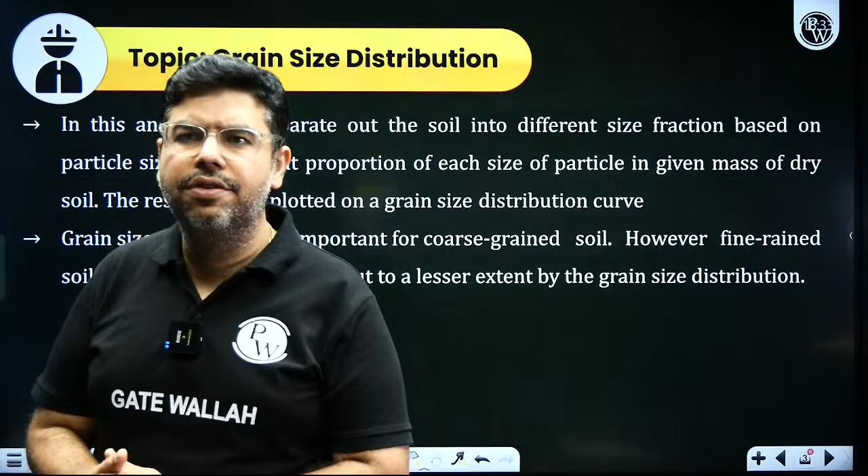grain size distribution. Okay. Today's topic is grain size distribution. So in grain size distribution, what we do is we separate out the soil into various size fractions and we try to determine the percentage of each size in a given soil sample, and the whole data will then be plotted on a grain size distribution curve.

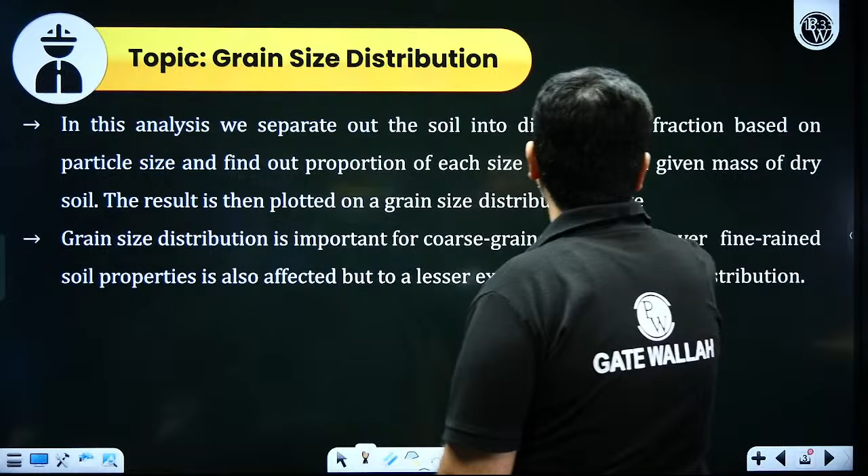So let's see how we will separate out the soil into various size fractions and how we will plot this grain size distribution curve. In this analysis, we separate out the soil into different size fractions based on particle size and find out the proportion of each size of particle in a given mass of dry soil, and the result is then plotted on a grain size distribution curve.

Now this grain size distribution is important for coarse grained soil. So the grain size distribution is more applicable to, or will alter, the engineering behavior of a coarse grained soil. Fine grained soil properties are also affected, but to a much lesser extent.

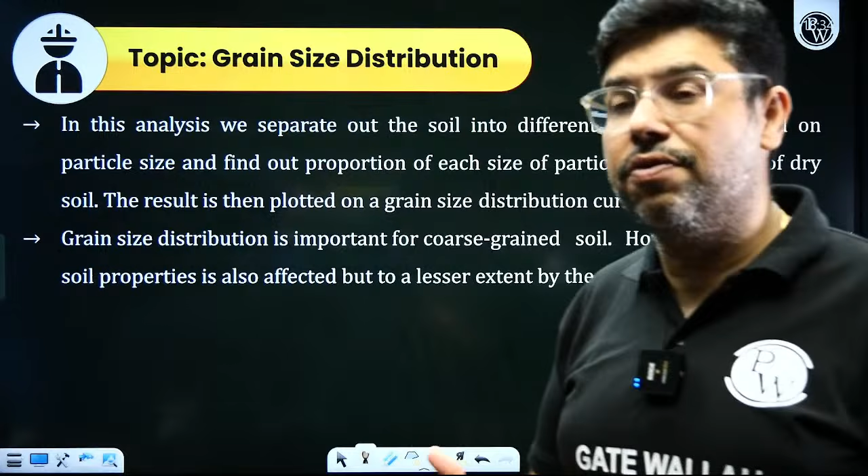Fine grained soil properties, we have seen, depend more upon the water content, like clays. Clays are fine grained soil. If you add excess amount of water, the clay will change into a liquid state or become very soft. And as you dry it, the clay will become stiff.

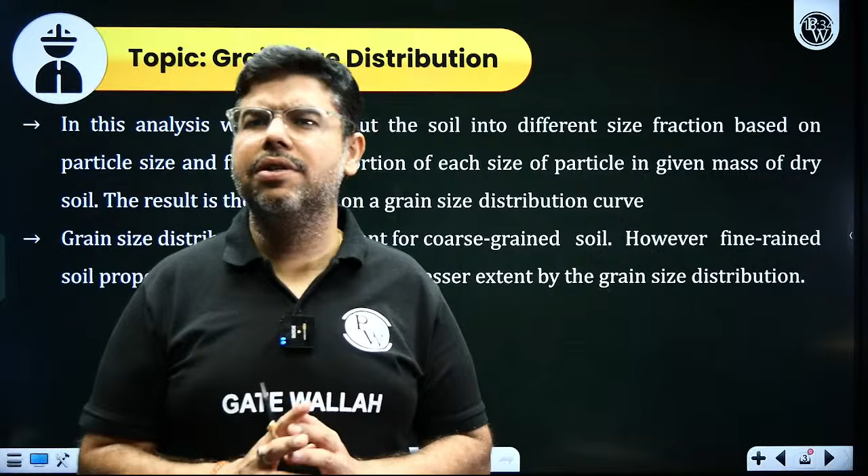So the engineering property of my fine grained soil depends more on water content, whereas the coarse grained soil property will depend upon the grain size distribution. How does the engineering property depend upon the grain size distribution? Let us see this, then I will show you how to determine the grain size distribution curve for a given soil.

See, you have various kinds of grain size distribution. Either the soil can be well graded - well graded means almost all sizes are present - or we can have poorly graded soil, also called uniformly graded, when the majority of particles are of the same size.

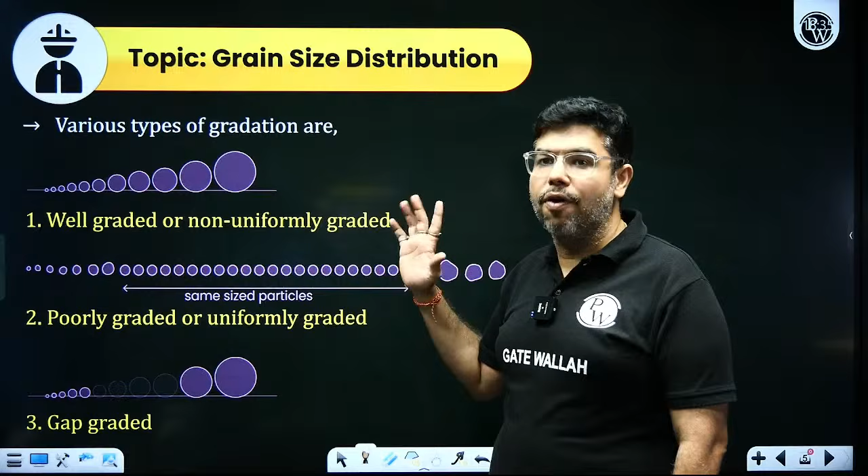You can see the majority of particles are of the same size, then it is known as uniformly graded or poorly graded. And if almost all sizes are present, then it is known as well graded or non-uniformly graded, because sizes are non-uniform. Okay. Then we can have gap graded also.

This means if some sizes are missing - either you have very large size or very small size, and the middle sizes are missing - so that kind of soil is known as gap graded soil.

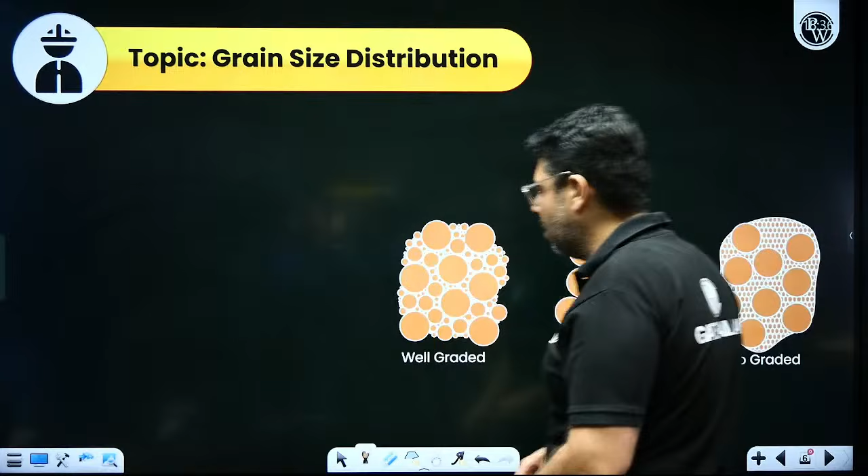Now, if a coarse grained soil is well graded, you can compact it to a very large extent. A well graded soil will look like this - the number of voids will be very less here. So you can compact it to a very large extent, the strength of the soil will be very high. In poorly graded soil, you will see a large number of voids, and this is how gap graded soil will look like.

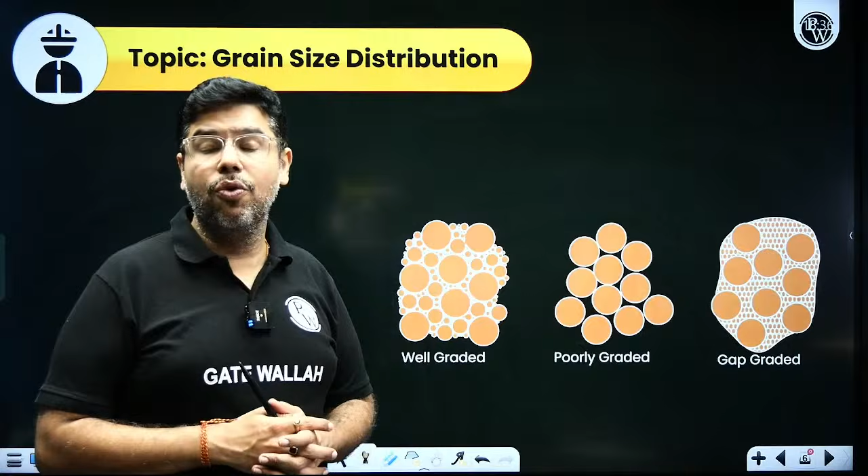So the engineering behavior of a coarse grained soil will then depend upon gradation. If you have well graded soil, you can compact it to a larger density, thereby giving good strength. Poorly graded soil will have large permeability through it, but it can't be compacted to a large extent. Same goes for gap graded soil. So, the engineering behavior depends upon the grain size distribution for a coarse grained soil.

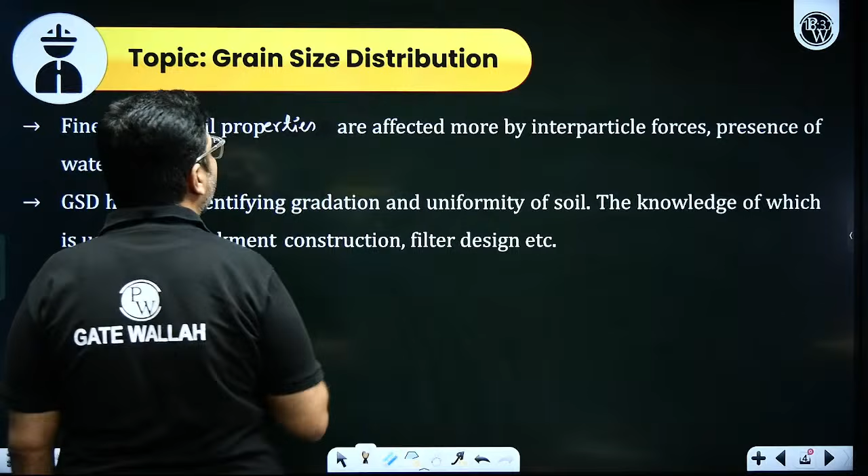So fine grained soil properties are affected more by interparticle forces and presence of water content, like I said. Fine grained soil properties depend more on interparticle forces, presence of water, etc.

GSD helps in identifying gradation and uniformity of soil, the knowledge of which is used in embankment construction, filter design, etc. So our GSD will help in identifying gradation as well as uniformity of soil, whether the soil is uniformly graded, well graded or poorly graded, and the knowledge of which will be used in embankment construction.

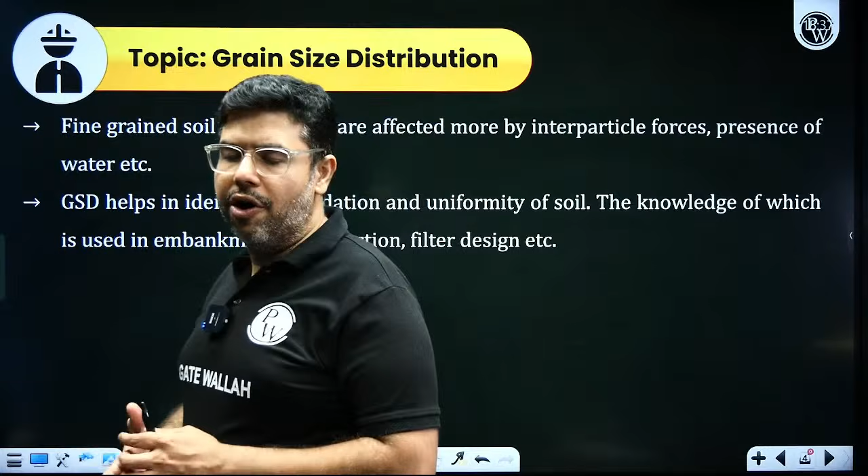For embankment construction, you are making an earthen embankment with the help of soil. There, you have to densify the soil to a very large extent, so we will go for a well graded soil. Got my point?

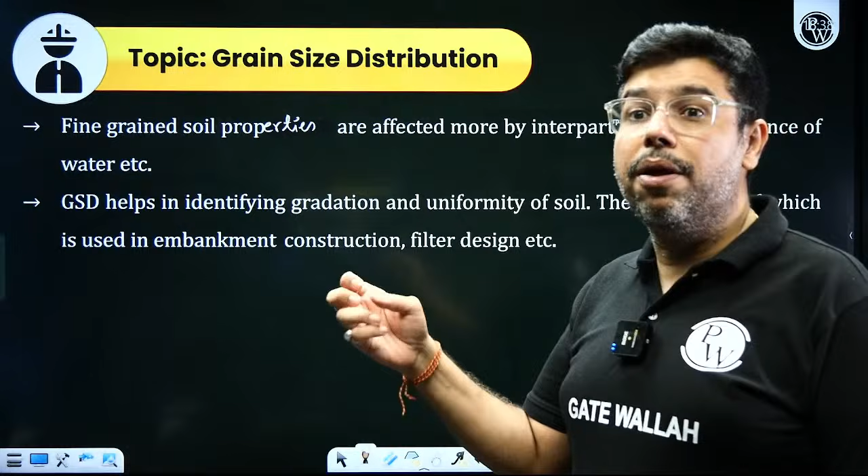Or we can have it for filter design. We are talking about sand filters. In sand filters, we have to design the voids such that water passes through the filter, but impurities do not pass. The void sizes should not be very large and should not be very small. The size of voids we can control with the help of this grain size distribution only.

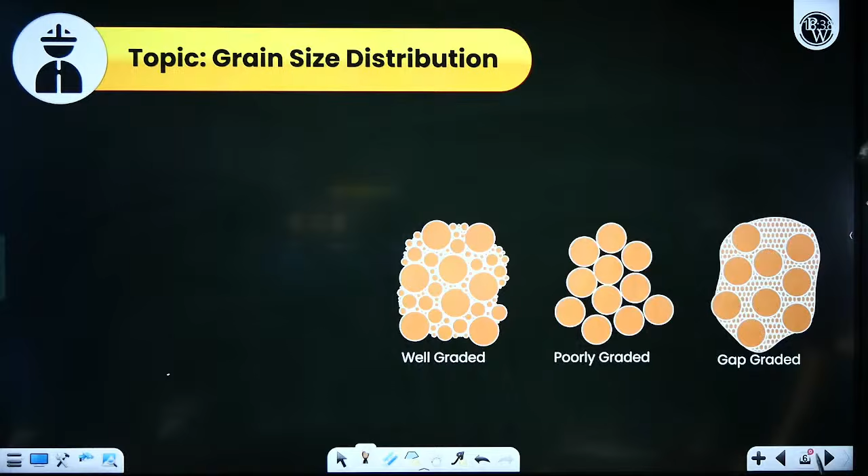Any doubts till here? I am proceeding now. The various types of gradation I have already shown you. Now, according to the size, how the soil is classified, let's see this. To classify the soil, we categorize it according to the size. Please focus here now. So, here we have size.

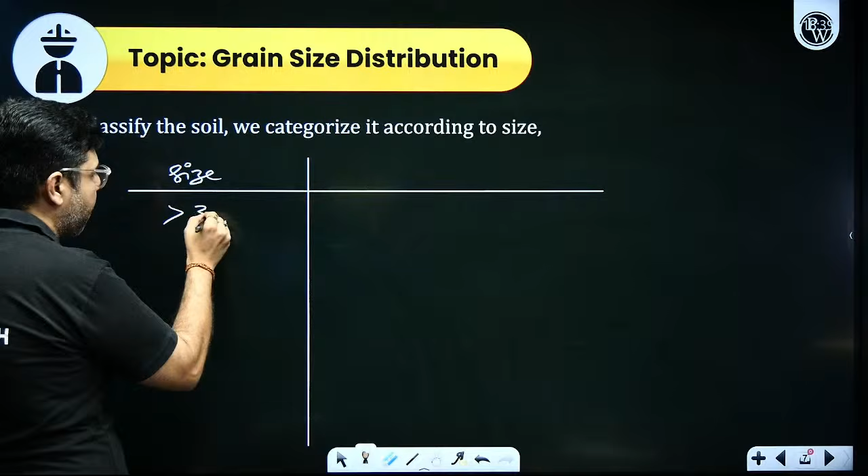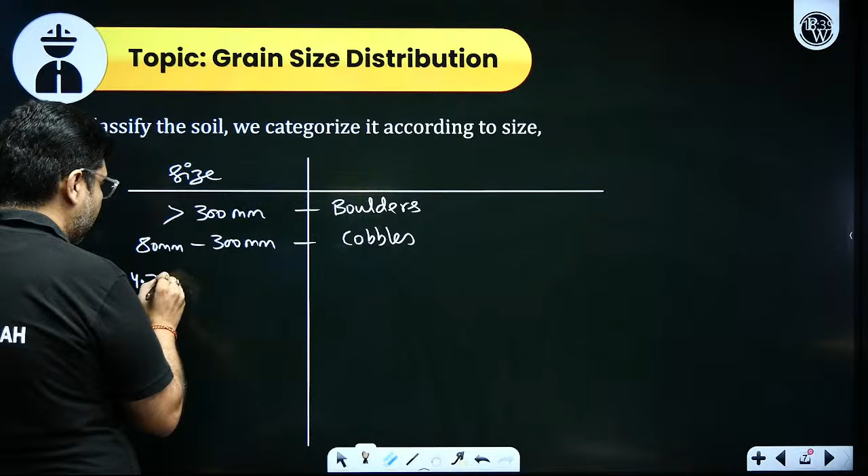If size is greater than 300 mm, the soil is known as boulders. If size is between 80 mm to 300 mm, then the soil is known as cobbles. If size is between 4.75 mm to 80 mm, then it is known as gravel. So these boulders and cobbles are not soil, they are just large stones. Now soil will start.

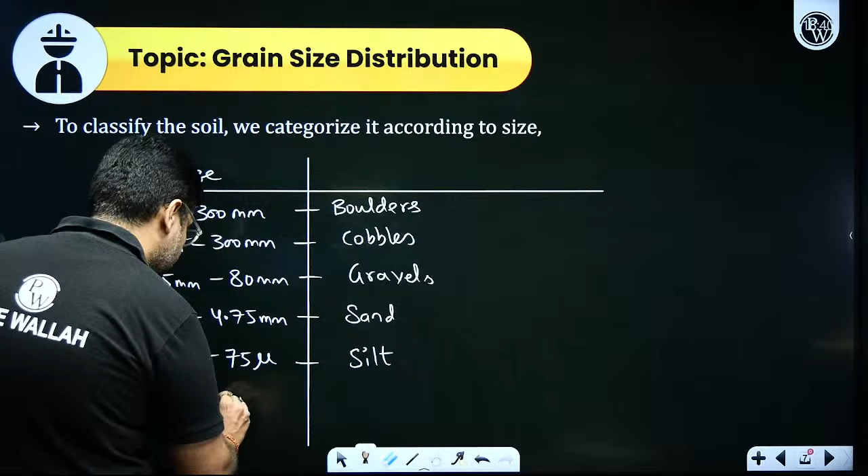If size is between 75 microns to 4.75 mm, then it is known as sand. If size is between 2 microns to 75 microns (1 micron is 10 to the power minus 6 meters), then it is silt. And lastly, if size is less than 2 microns, then it is known as clay.

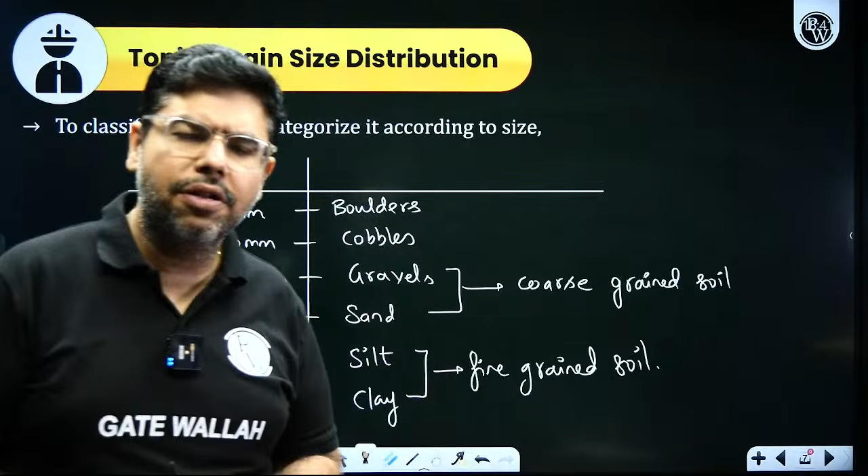So gravels and sand are coarse grained soil particles that can be seen with the naked eye. Silt and clay are fine grained soil; these particles are not visible to the naked eye. A normal human eye can only see particles having size greater than 75 microns, so coarse grained soil particles have size greater than 75 microns and can be seen with the help of the naked eye. But in the case of fine grained soil, you won't be able to see the individual particles. Got my point?

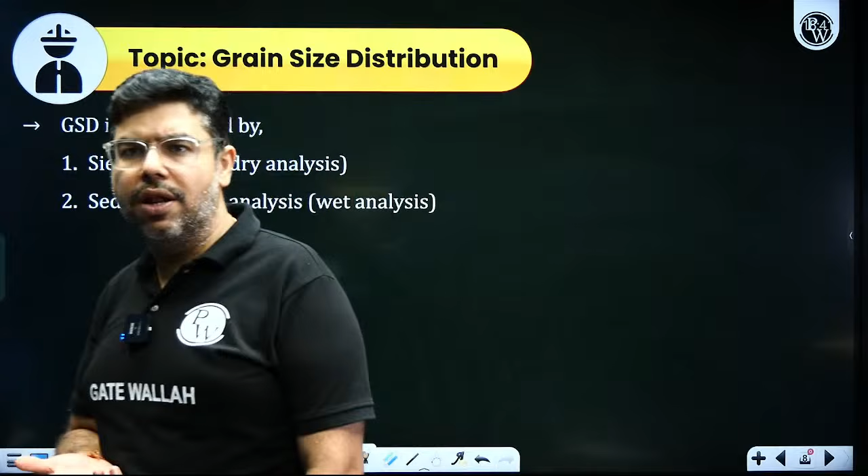Now, how is this GSD curve determined? GSD is determined using two methods: either using the sieve analysis or by using the sedimentation analysis. Today I would be covering only the sieve analysis in detail. Sedimentation analysis is not that important. So for the coarse grained soil, the GSD is determined using the sieve analysis.

Let us see the sieve analysis in detail today. Any doubts still here? Please ask me. You can take a note. If you have any doubts, please ask me. Now we will see the sieve analysis in detail.

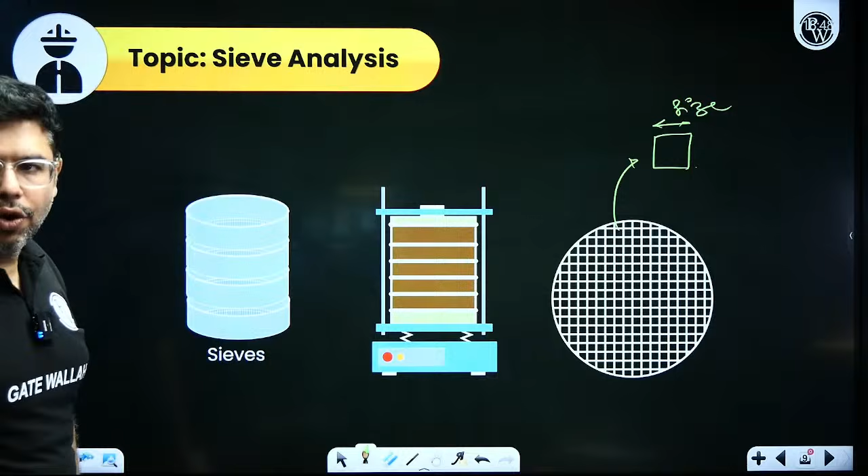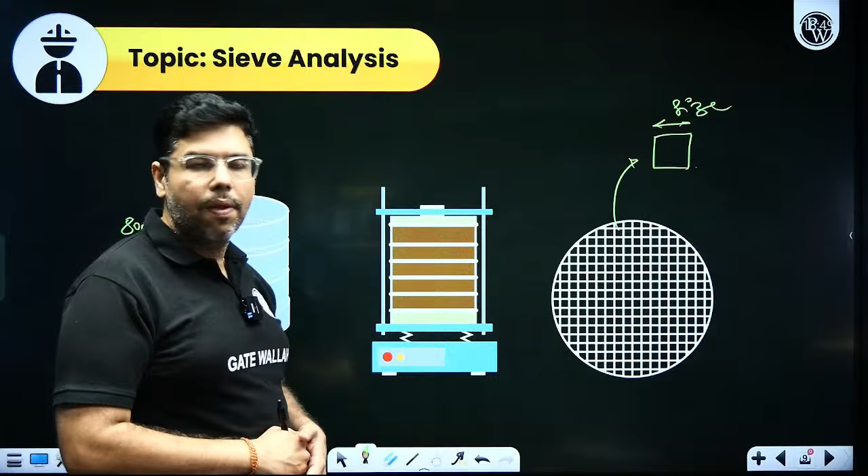Now first, you will arrange this sieve in a decreasing order, meaning the largest sieve will be on the top and the smallest sieve will be on the bottom. Let's say 80 mm is the sieve of the largest size and 75 micron is the smallest sieve. You will arrange this sieve in decreasing order on this vibrator, and then you have a pan which will collect the particles that are finer than 75 microns.

Then you will pour a dry soil sample on this shaker. So you will take a dry soil sample, say 1 kg, and pour it on the top sieve. Then on this shaker, it will start vibrating, and the particles will start sieving.

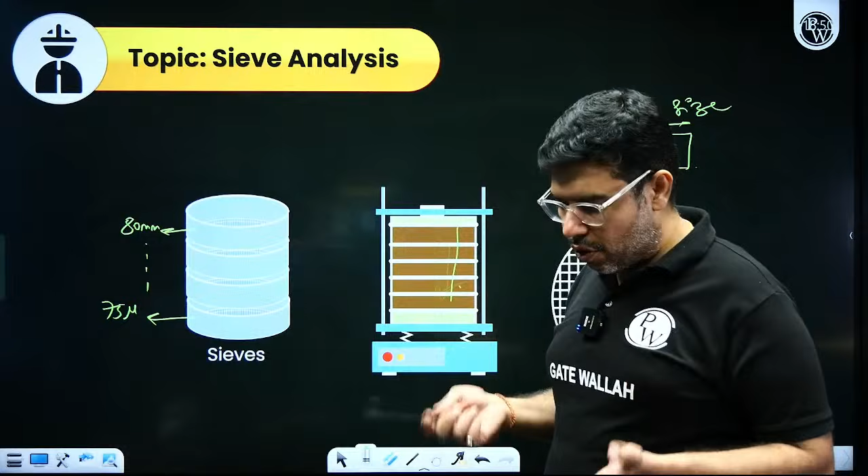This will collect particles greater than 80 mm, and so on, as the particles sieve through. After all the particles have sieved, you will dismantle all the trays and find the weight retained on each sieve. Using that data, we will plot the grain size distribution curve. How? I'll show through a numerical example.

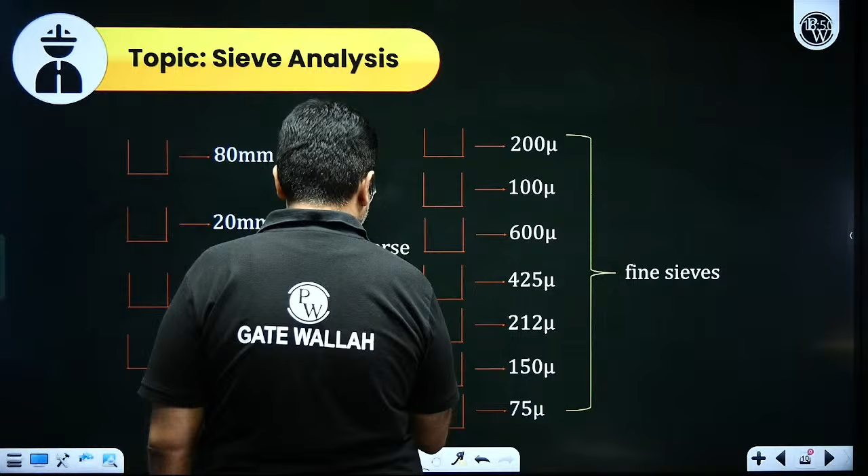You have coarse sieves as well as fine sieves. Coarse sieves have size greater than 4.75 mm. Fine sieves have size between 75 micron and 4.75 mm. These coarse sieves will collect gravels, and both collect coarse grained soil only. For fine grained soil, sieve analysis will not work.

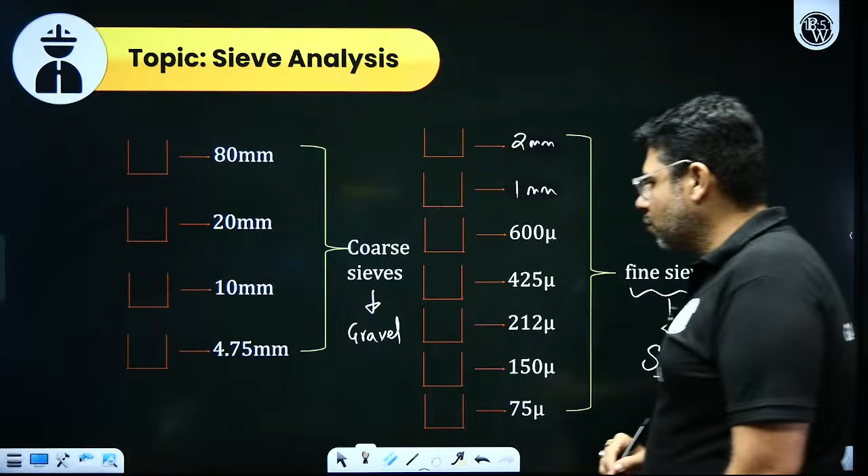These fine sieves will collect sand particles, and the coarse sieves will collect gravel particles. Okay, got it?

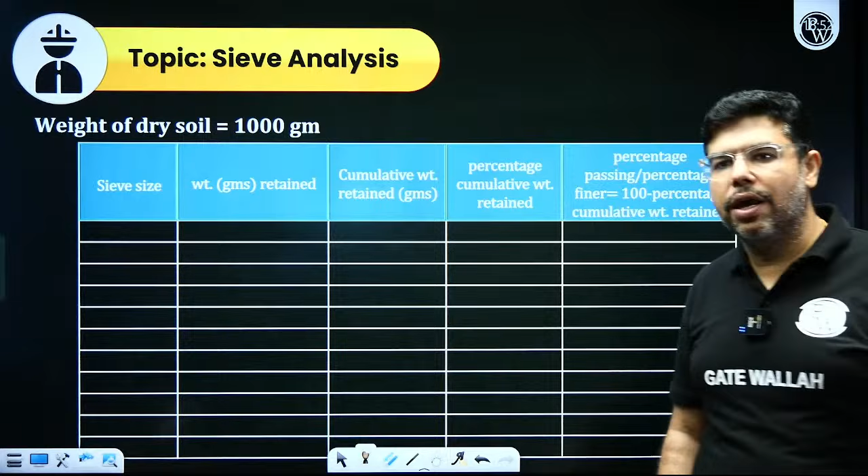Now let's arrange the data here. Weight of dry soil is 1000 grams. Let's take this 1000 gram weight of soil and I will give you the sieve size data. Using that data, we will do all the calculations and then plot the grain size distribution. So let's start, my dear friends.

So the sieve size data: we had many sizes, but you don't have to remember the size of the sieves. Nobody will ask you that. I have just given these sizes, which are Indian standard sieves, so that we can solve a question on the same. There can be more sieves between these sizes also, but don't worry about remembering them.

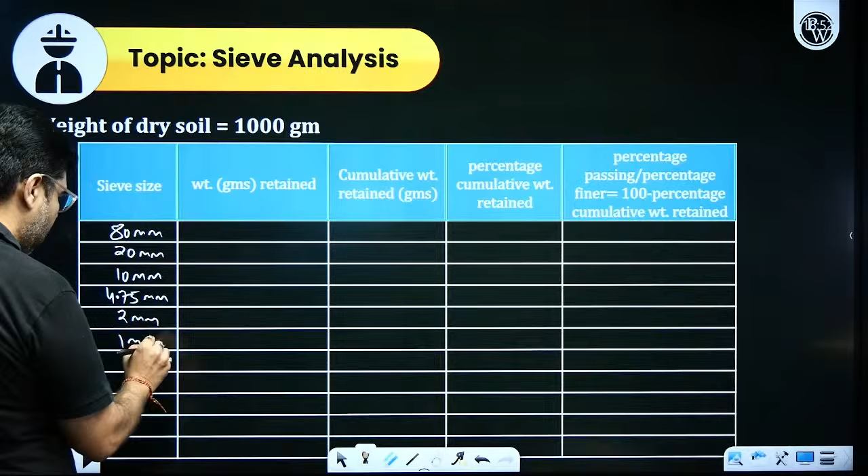So the sieve sizes are 80 mm, 20 mm, 10 mm, 4.75 mm, 2 mm, 1 mm, 600 microns, 425 microns, 212 microns, 150 microns, and lastly 75 microns. Particles finer than 75 microns will be collected on the sieve tray itself.

Got it? Very good. Now, the weight retained on each sieve - this data was given to me.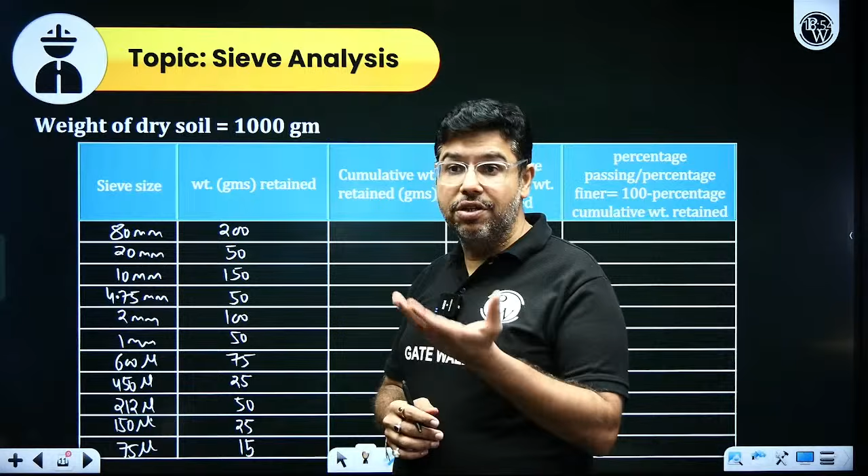Just sum it up, please. Tell me what summation you are getting. If you sum it up, you will get 790 grams. But total weight was 1000 grams. So where did the remaining 210 grams go? It is on the tray - they are fine grained particles. If you want to do the GSD of these fine grained particles, we have to go for sedimentation analysis.

Okay, no problem. So first I will find out the cumulative weight retained. Tell me fast, how much will it be, my dear friend?

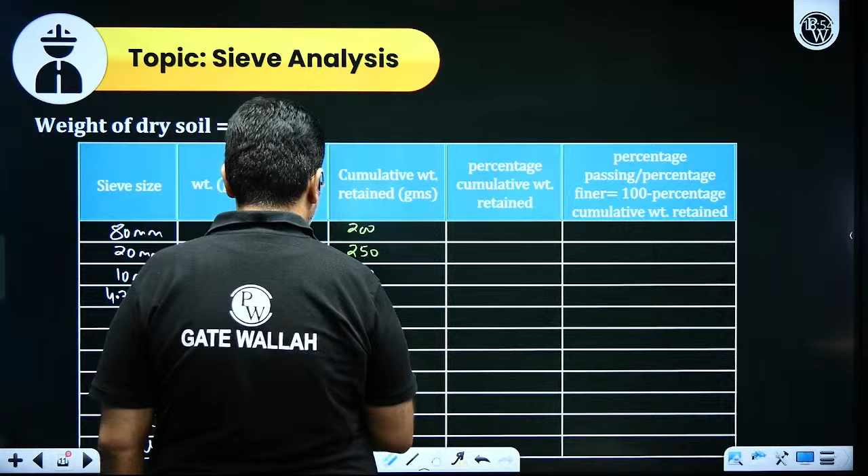Cumulative weight retained values are: 200, 250, 400 grams, 450, 550, 600, 675, 700, 750, 775, and lastly 790. This data I have written here.

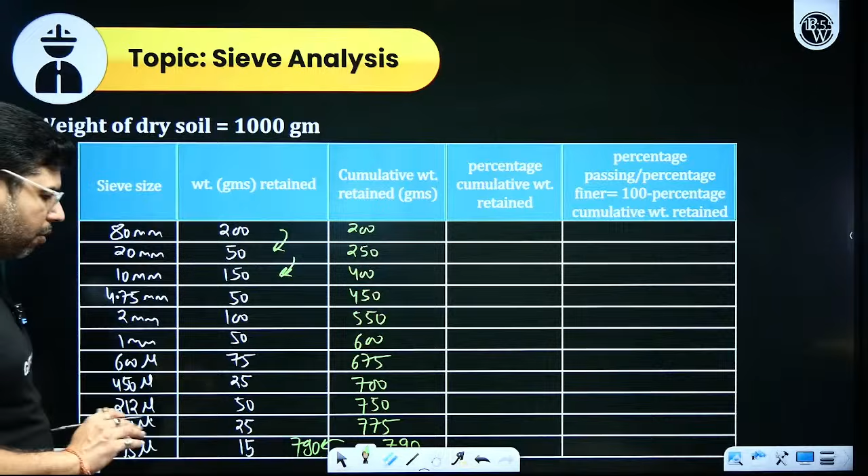Then percentage cumulative weight retained will be how much? 200 will show how much particles have size greater than 80 mm, divided by total weight that is 1000, into 100. That will be 20%. Then we get 25%, 40, 45, 55, 60, 67.5, 70, 75.

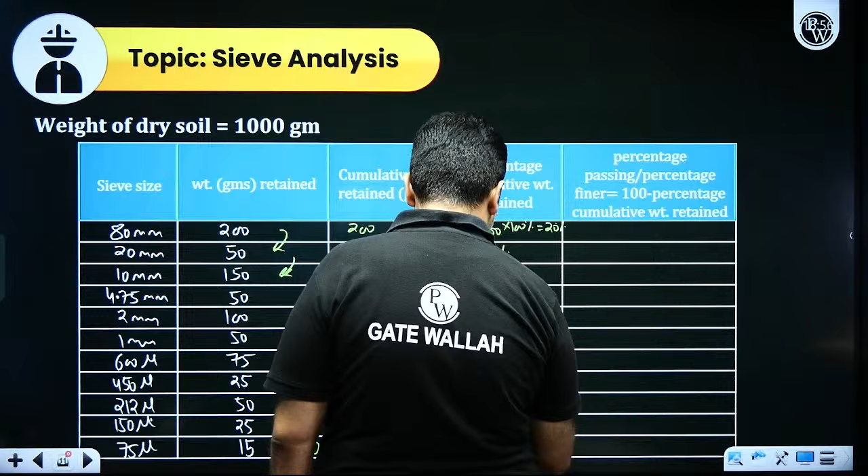Then we have 77.5% and 79%. Percentage finer will be 100 minus cumulative weight retained. 100 minus 20 is 80%. Then we have 75%, 60%, 55%, 45%, 40%, 32.5%, 30%, 25%, 22.5%, and 21%.

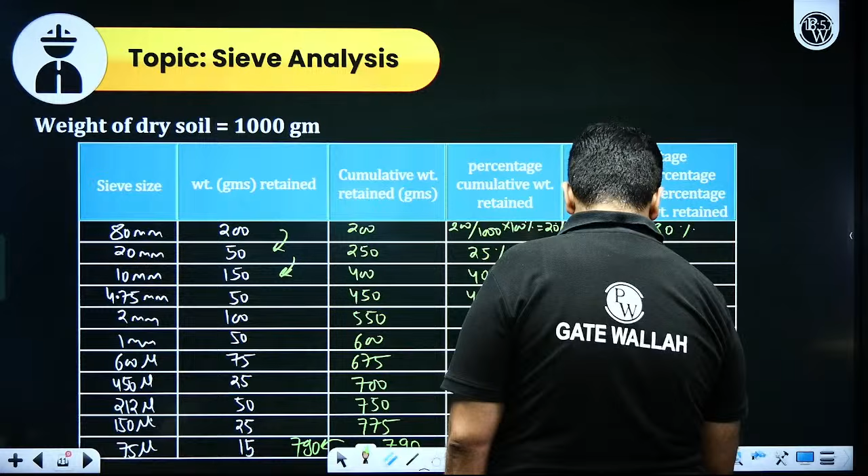So these are the percentage passing or percentage finer values. Now let's plot this percentage finer against the size of the particle. This whole data is plotted on a semi-log paper. What is this semi-log paper? I will show you in detail.

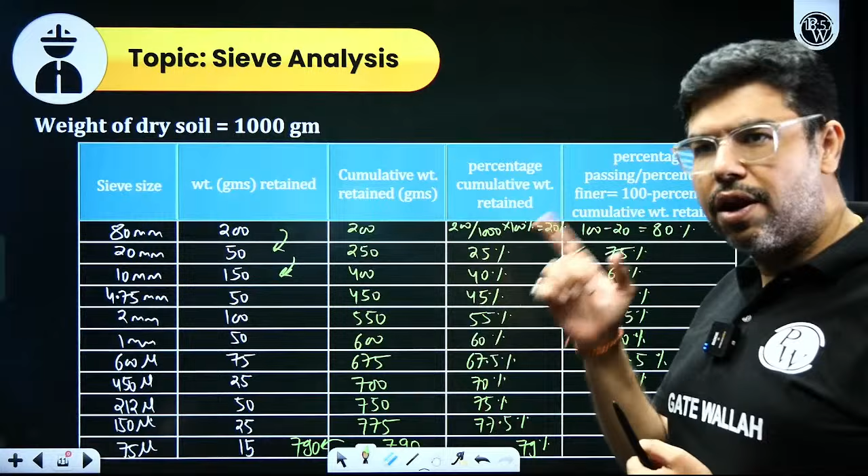X-axis will be in log scale and y-axis will be a normal scale. This percentage finer represents particles smaller than 80 mm. So obviously if 20% particles are larger than 80 mm, the remaining 80% will be smaller than 80 mm. Therefore it is 100 minus percentage cumulative weight. Got my point? Very simple.

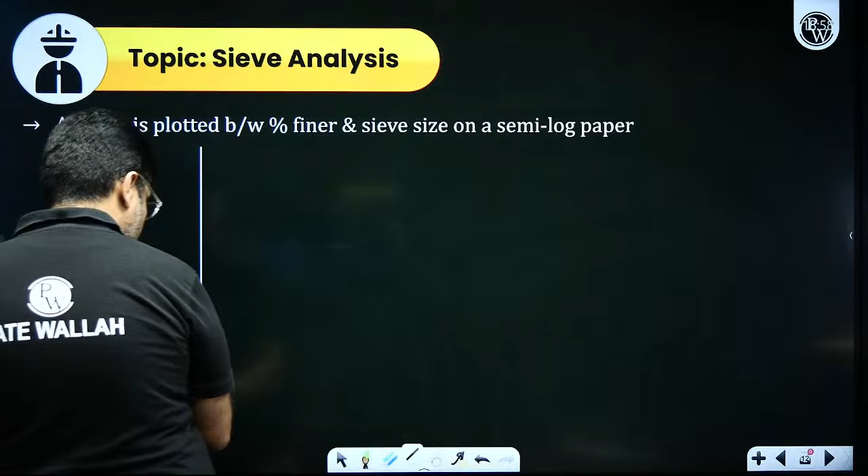Now let's plot this data, and from here you will get the GSD curve. A graph is plotted between the percentage finer and the sieve size on a semi-log paper. On this semi-log paper, I will take percentage finer or percentage passing on one axis, and sieve size on the other.

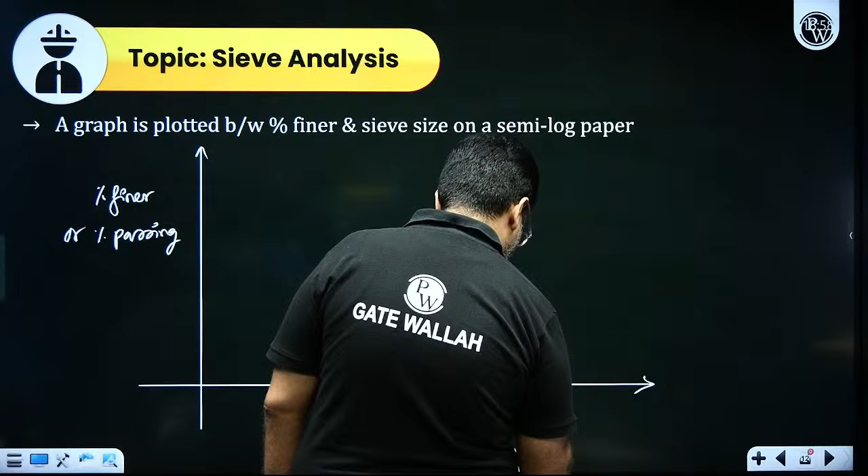We will plot the percentage finer versus sieve size, and you will get an S-type curve. I will plot the points first and then you will get this graph, but I am doing it in a reverse manner now.

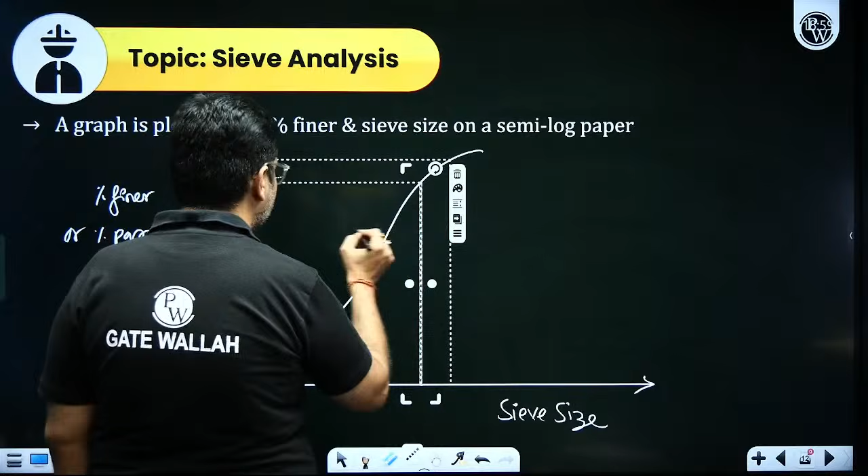First you should plot all the points. So I will show you all the points, like for 80% we have many points, so I will show that first. Using this data I will get this GSD curve. When you plot all the points, you will get the GSD curve. Like here I have many points.

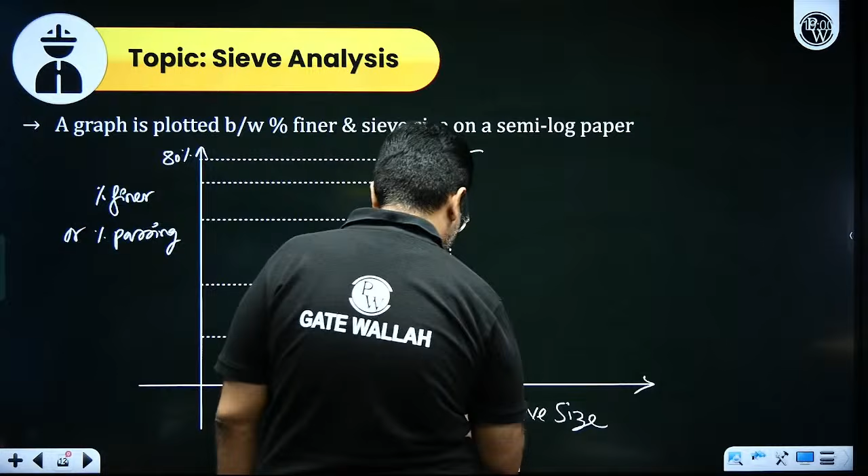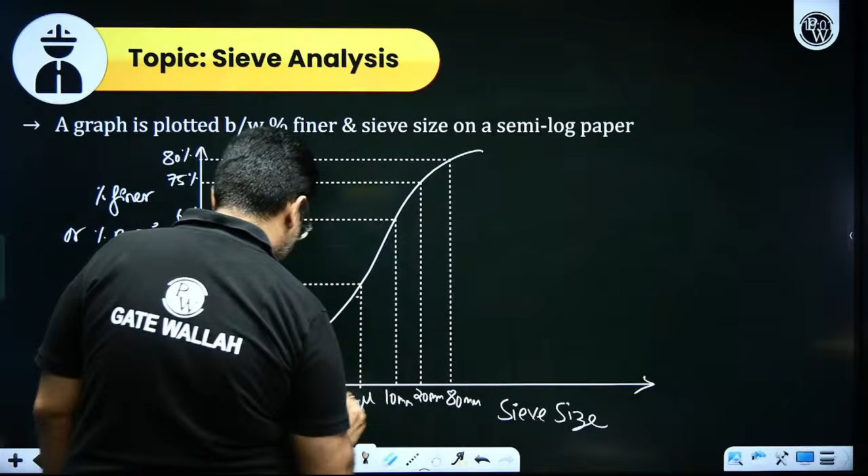For 80 mm size, the percentage passing is 80%, so that's 80% at 80 mm size. Then for 20 mm we have 75%. Then for 60% you have 10 mm. Then I will take the data for 30%, that is 450 microns. Rest of the data will also be there, don't worry. One more data point for 21%, that is 75 microns.

Not a problem. You will join all these points and you will get the GSD curve. So this is my GSD curve. Few things you have to note here, my dear friend. This is my GSD curve. Now, few things you should note here.

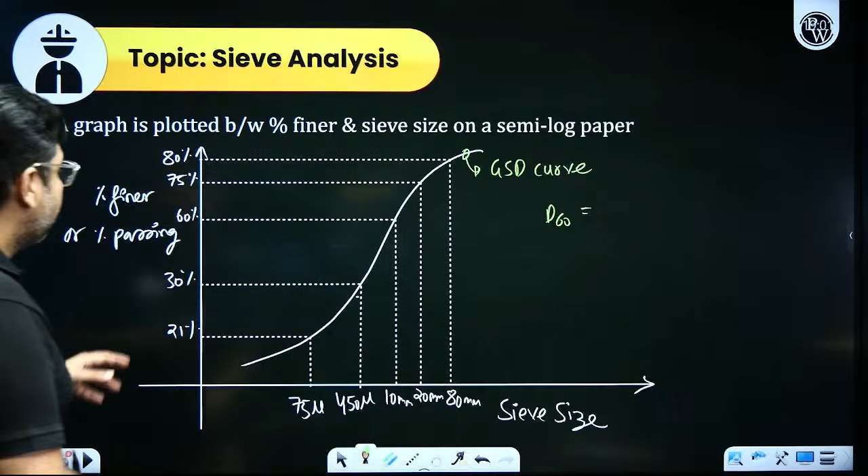First, I will show you what is D60. D60 is the size of particles such that 60% of particles are finer than that size. That is corresponding to 60% finer. What is the size? That is D60, and that is 10 mm. Similarly, corresponding to D30, at 30% we have 450 microns.

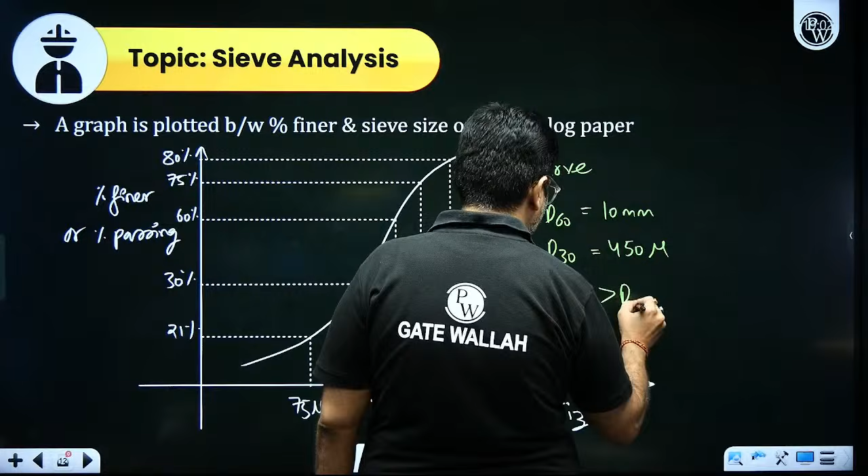See, this curve will always be increasing because we have done the experiment like that. This curve will always be an increasing curve as shown. So D60 will always be greater than D30. And D10 we can't calculate here because I don't have all the data, but D10 would be smaller than D30. This will always occur because the curve will always be an increasing curve.

So, D60 is the size of particles such that 60% of particles are finer than that size. D30 is the size of particles such that 30% of particles are finer than that size. And lastly, D10 — D10 is also known as the effective size of the particles.

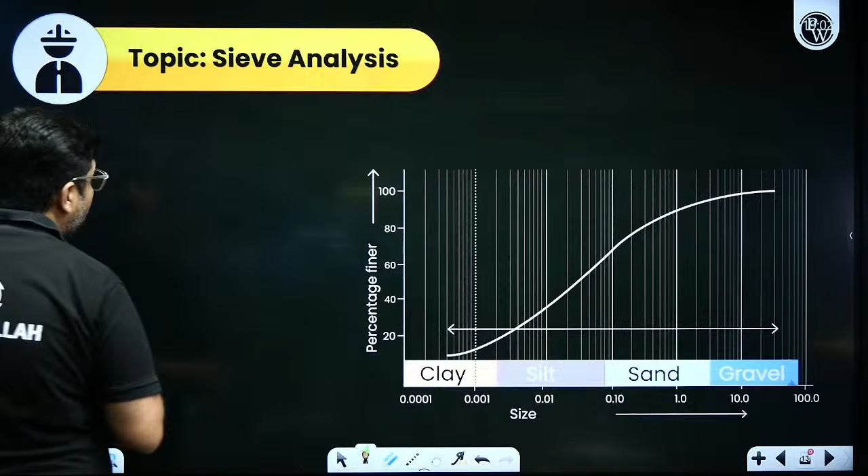Not a problem. So, this is how a semi-log paper will look like. See here, the range of size is very large, so a normal graph sheet you can't use. See, I have to plot the clay particles.

Clay particles have a size of 2 microns, and your gravels have a size of 80,000 microns. So the range is very large, you can see. A normal graph sheet won't be able to accommodate this much range. So therefore, we have to go for a semi-log paper.

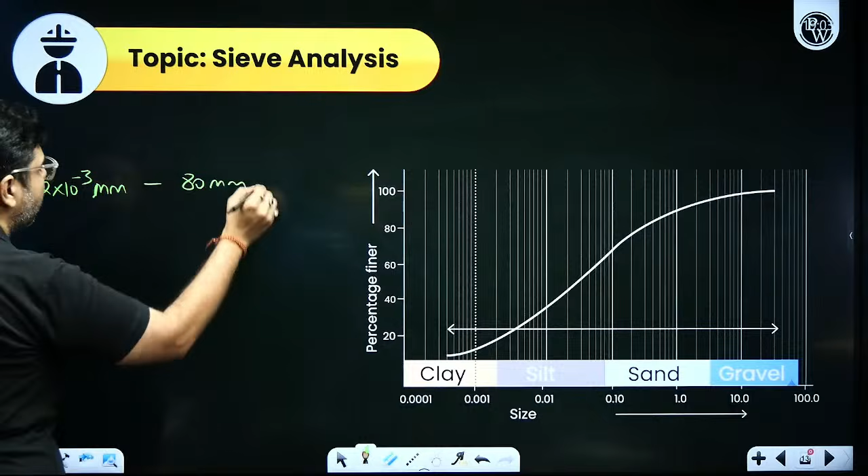Log is already calculated here. So here you can plot the clay size as well as the sand size. For example, clay is less than 2 into 10 raised to power minus 3 mm, and here it is 80 mm. So here, see, log is already calculated. This is 10 raised to power minus 4 mm, minus 3, minus 2.

See, the log scale will go on in powers: 10 to the power minus 1, 10 to the power 0, sorry — 10 to the power 1, and lastly 10 to the power 2. So gravels will come here, then sand, then silt, then clay. Log is already calculated here, so you can easily plot all the sizes and corresponding percentage finer and get the GSD curve.

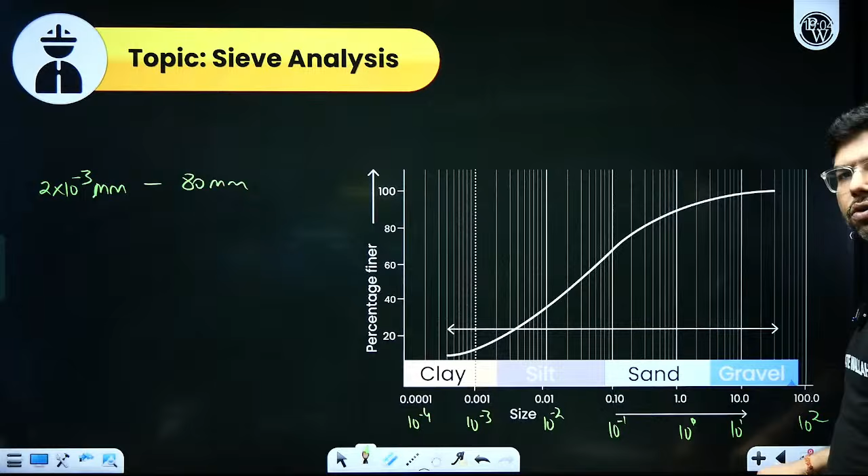So why do we have to use this special graph sheet? Because the range of size was very large. So this is the semi-log paper that I was talking about, this is how it looks like. You don't have to take it down in your notes, I just wanted to show you what a semi-log paper is.

So D60 is the size of particles such that 60% of soil particles are finer than that size. The GSD curve can be used to identify the gradation of coarse grained soil. The various types of curves that can be obtained — now I will show you the various types of curves that can be obtained using the GSD curve, and by seeing the shape of the curve we can say whether the soil is well graded, poorly graded, or gap graded.

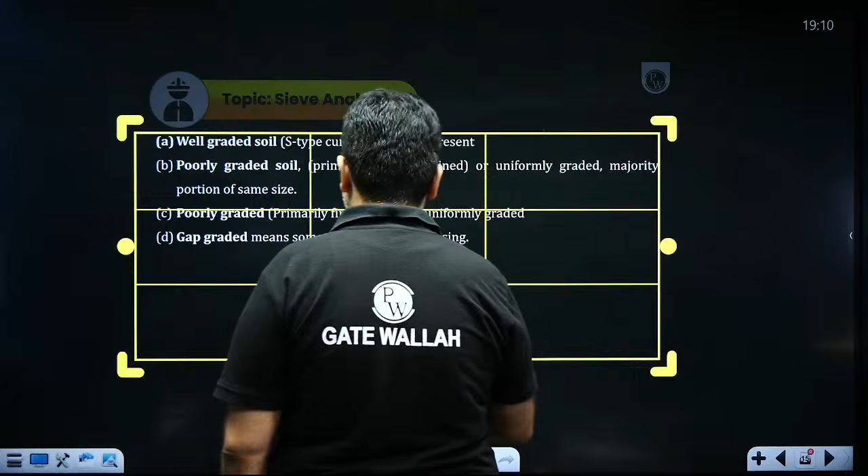Can I proceed further? Okay, any doubts? So we have various kinds of GSD curves that you can get here. Let me show you the various kinds of GSD curves. Let's see the various types of GSD curves that I can obtain, and you have to tell me which curve belongs to which category. See, when we have plotted, we have various kinds of GSD curves here. What are the various types? Let's see. What are the various types of GSD curve here? Let's see.

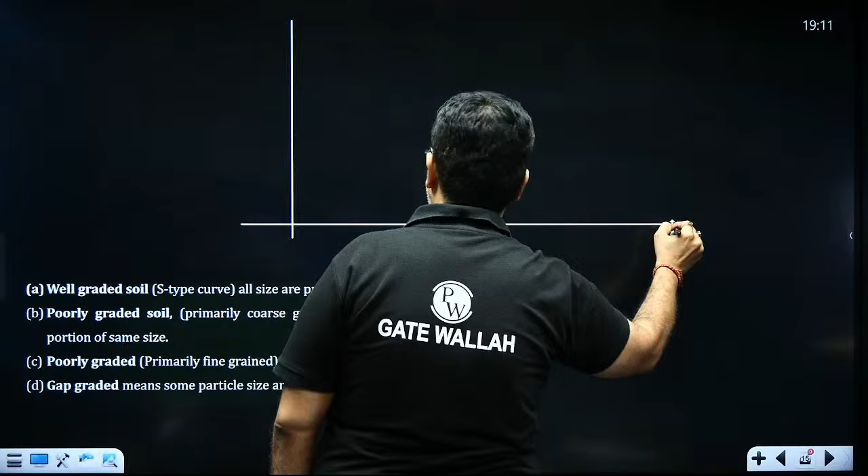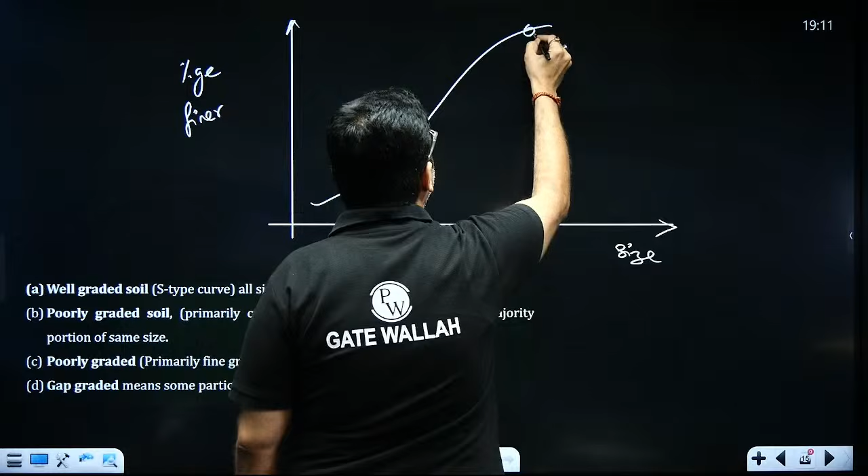This is size versus percentage finer, okay. First curve that you are getting. This shows me a well graded soil, because almost all sizes are present. For every size you will get a percentage finer. So this is an S type curve. It is a well graded soil, that means almost all sizes are present here.

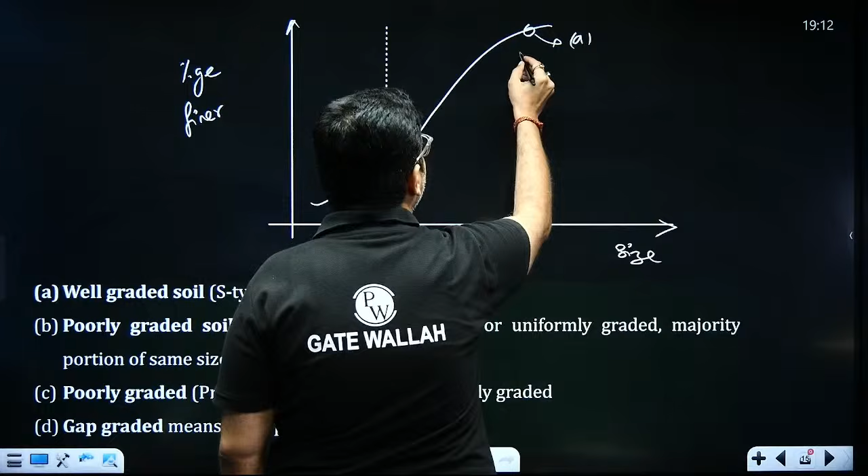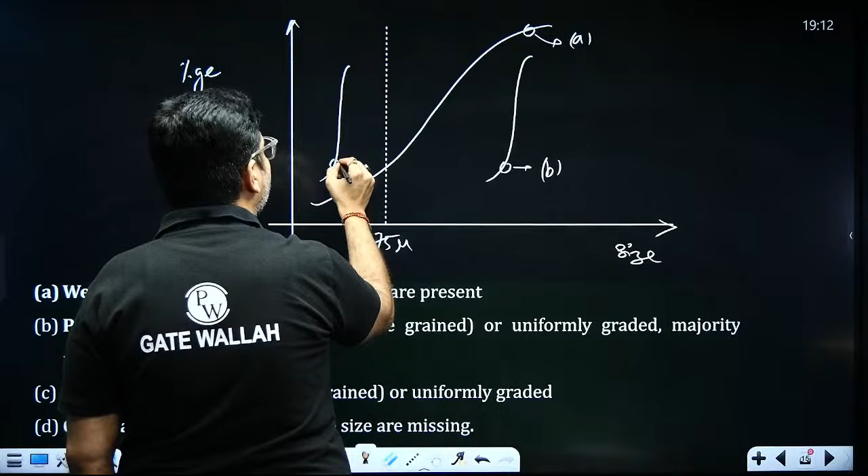Then a poorly graded soil, primarily coarse grained. How would it look like? Let me show you. This is my 75 micron line. So if you get a vertical curve here like this, which shows that majority of particles are of same size, then it is a poorly graded soil. See a vertical curve, almost all sizes are uniform, very narrow range of sizes, and particle size is greater than 75 microns, so it is a coarse grained soil. Plus you can get this type of vertical curve on this side also. This is primarily fine grained soil, again a poorly graded soil, but primarily fine grained. That is a C type, or it can be shown as uniformly graded as well.

Then the last type of curve that we can have is a stepped curve like this. This tells me that the soil is gap graded. How? That I have to show you. The horizontal portion of this curve is actually the break of continuity. For the sake of explanation I am drawing the curve, but in this portion the curve is discontinuous. These sizes are missing. How am I so confidently saying this? Let me show you.

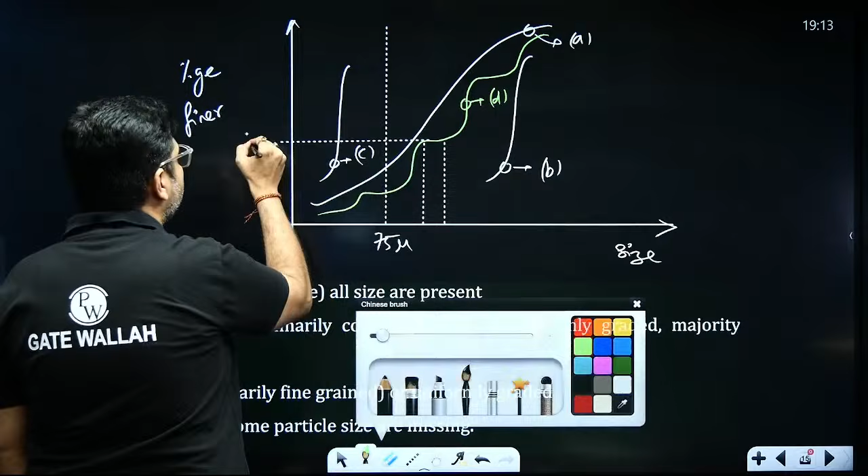Say for example, for 40% passing, you have two sizes available, 1 mm as well as 2 mm. So for the 1 mm as well as 2 mm sieve, your percentage passing is same, 40% and 40%. It can happen only when there is no retained on the 1 mm sieve, meaning 0% retained here. That means we don't have any particle sizes between 1 mm to 2 mm. Here it is 0% retained. Got my point? So this you should understand here.

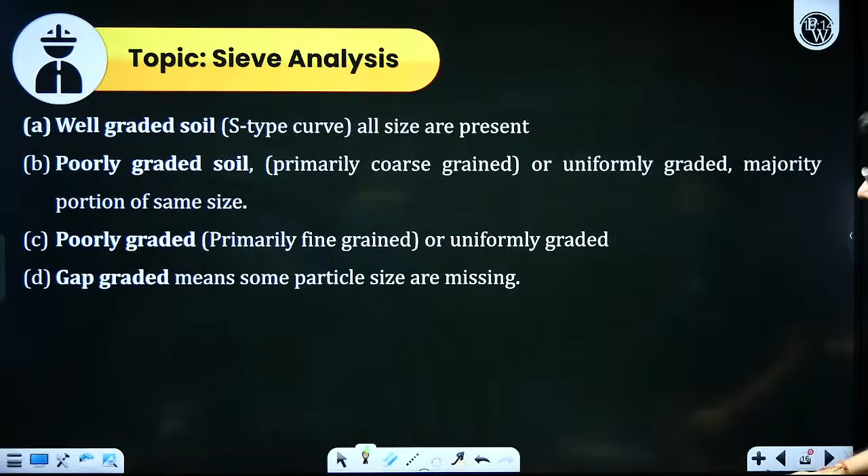So, well graded soil means all sizes are present. Poorly graded soil, or uniformly graded, means majority portion is of same size. And we have poorly graded, uniformly graded, or gap graded. Gap graded means some portions are missing, so the horizontal portion of the curve shows that some sizes are missing, like I have shown in the example as well.

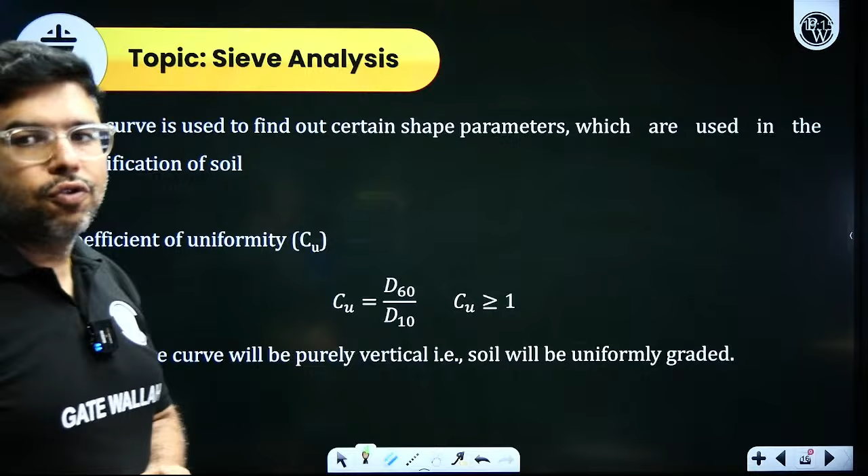Okay, now we are engineers, we see everything mathematically. So, mathematically, some shape parameters are defined. The first shape parameter is known as coefficient of uniformity, and the second one is known as coefficient of curvature. Seeing these values also, we can say whether the soil is well graded or poorly graded. The GSD curve is also used to find out certain shape parameters which are used in classification of soil. The first one is coefficient of uniformity.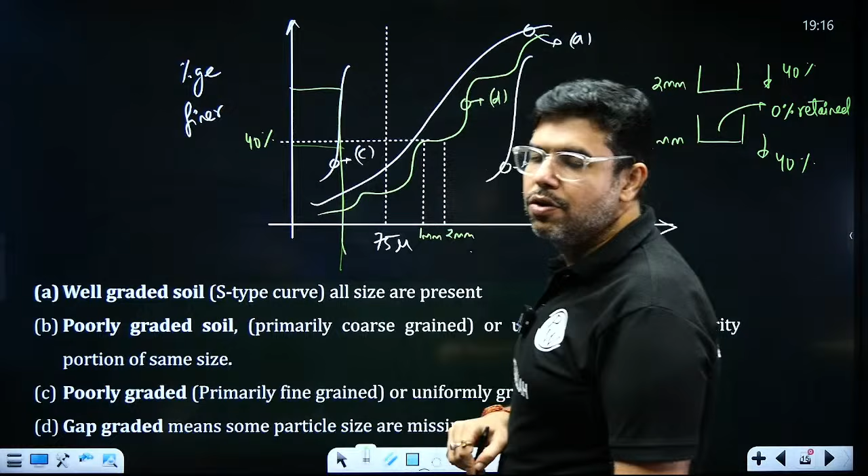Cu is what? Cu is D60 upon D10. Cu is always greater than or equal to 1, because D60 is always greater than D10. If Cu is equal to 1, the curve is purely vertical, and D60 and D10 will be same only when the curve is purely vertical. See, for 60% also same size and for 10% also same size—that can happen only when the curve is vertical, that is, all the particles are of same size. So it is uniformly graded soil. As you increase the value of Cu, the range of size will increase, that is, you will shift towards the S type curve.

Then one more parameter is defined, that is coefficient of curvature: D30 square upon D60 into D10. D30, D60, D10 we can obtain from the GSD curve only. D10 is also known as the effective size of particle, as I have told you before.

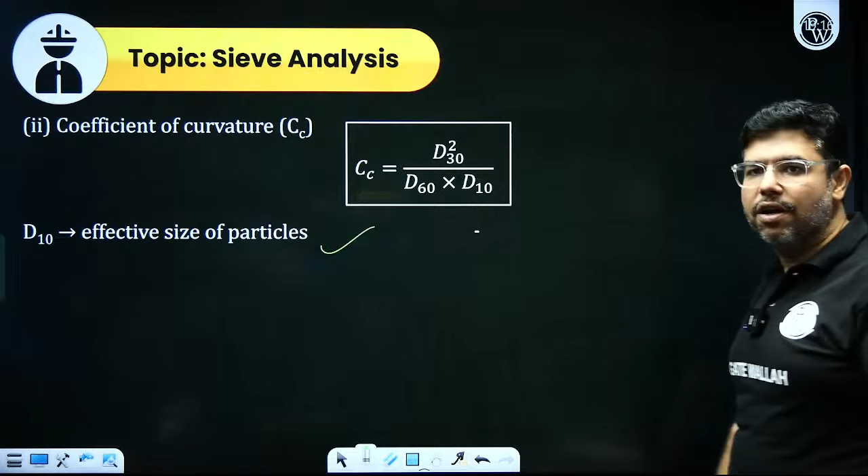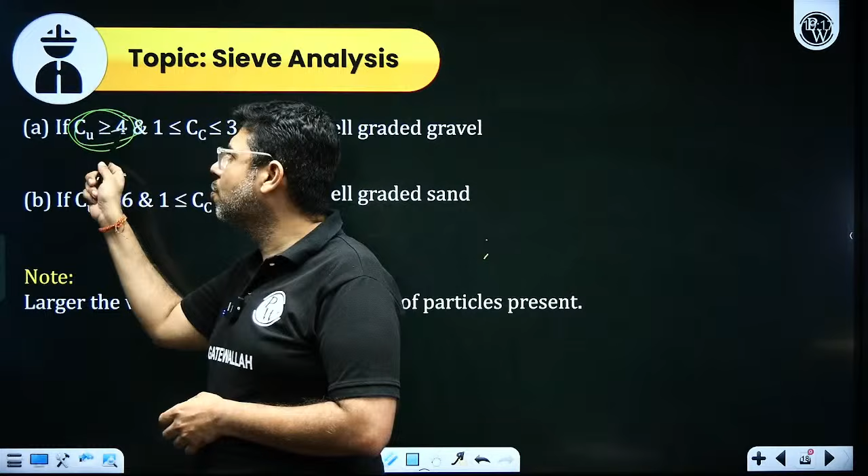Now, if Cu is greater than or equal to 4 and Cc is between 1 and 3, remember this limit, then it is well graded gravel. Whereas if Cu is greater than or equal to 6 and Cc is between 1 and 3, it is known as well graded sand. This limit you have to remember, but let me tell you the logic why for gravel Cu is taken less and for sand Cu is taken as more.

See, in smaller sizes, the variety of sizes can be more, but for larger particles, the variety of sizes will be less. So for gravels, generally Cu will come out lesser compared to sand, because smaller the size, larger will be the variety of sizes. Larger the variety of sizes, larger would be the value of Cu. So larger the value of Cu, larger is the range of particles present.

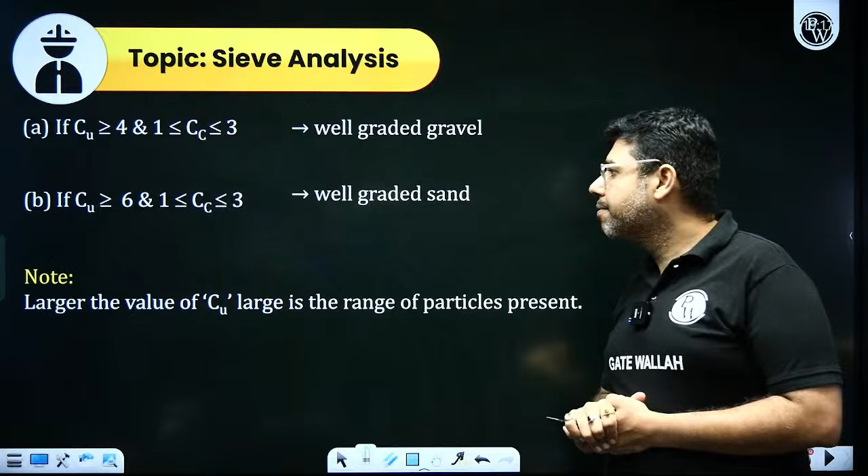So if any of this limit is not satisfied, then the soil is poorly graded. For well graded gravel, Cc should be between 1 and 3 and Cu should be greater than 4. Similarly, for well graded sand, Cu should be greater than or equal to 6 and Cc should be between 1 and 3. Got it? We have seen many things today. Let us do a question on this concept now.

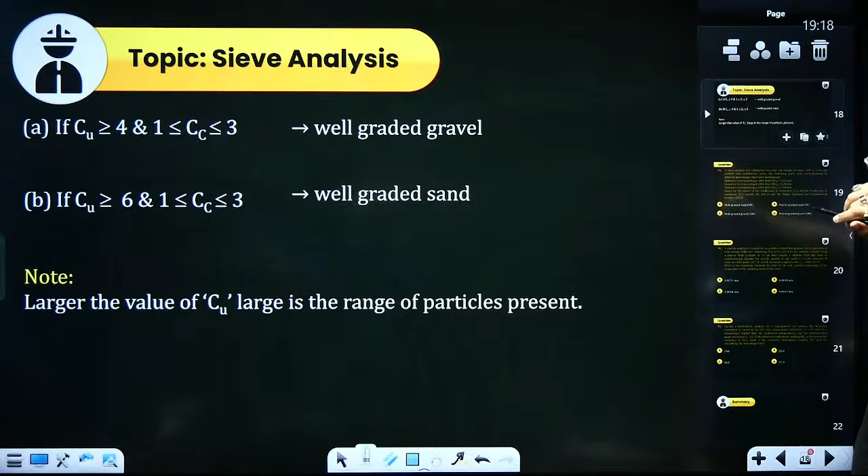Let us see a concept here now, a very interesting concept I will show you. Now let us see a question, a good question I will show you. Please note it down till here. If you have any doubts, you can ask me. Rest, you can start attempting this question. You have to find whether the soil is well graded sand or what it is.

Okay. Poorly graded sand, you are getting what answer? Poorly graded sand?

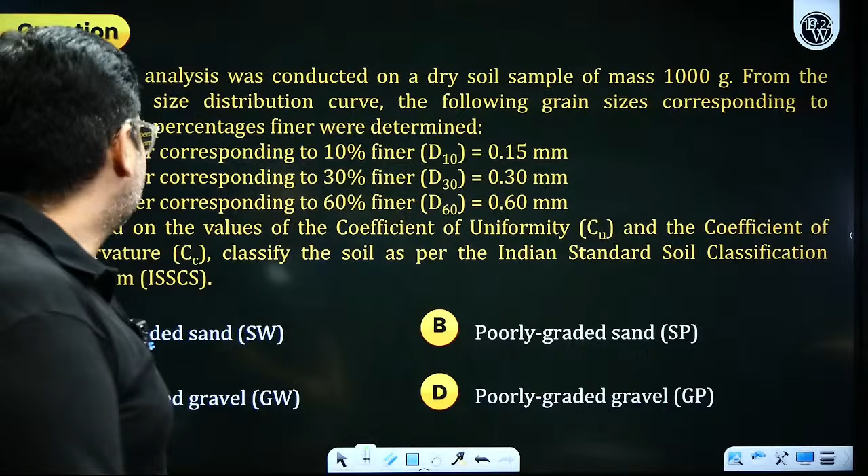So, sieve analysis was conducted on a dry soil sample of mass 1000 grams. Total weight of the soil was 1000 grams. Now, it was said that D10 is such that 10% particles are finer than 0.15 mm. So D10 was given to me as 0.15 mm.

D30 is 0.3 mm. You can see that majority of particles are between 75 micron to 4.75 mm, and 60% particles are finer than D60, which is 0.6 mm. This was given to me in the data.

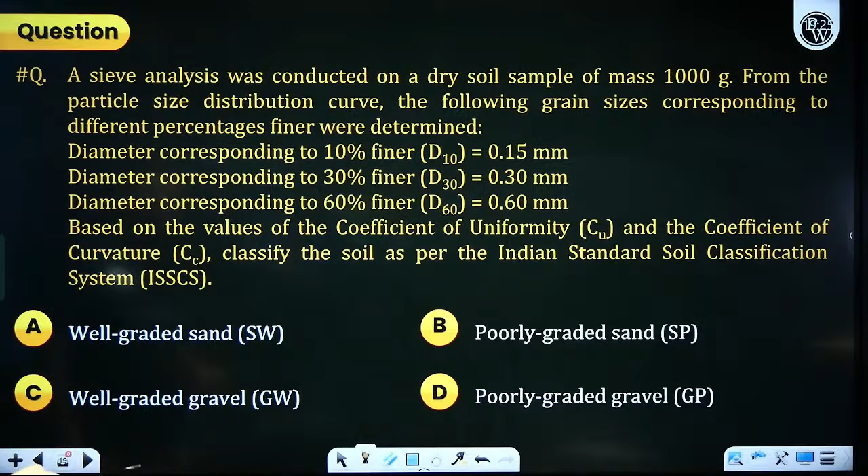Cu and Cc we have to find out, and classify the soil as per that. Majority of the particles have size between 75 micron and 4.75 mm. This implies it is sand only, because I can say that majority, more than 50% of the particles, have size between 150 microns to 600 microns, which means it is between 75 micron to 4.75 mm range. That means it is sand, that is confirmed.

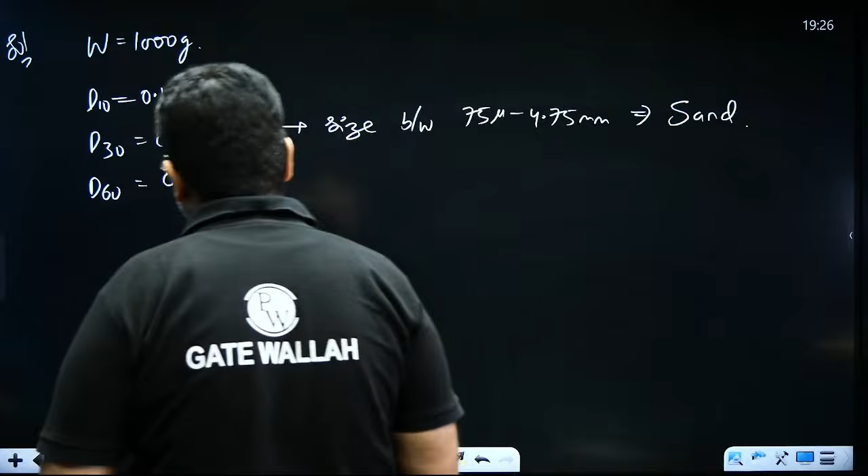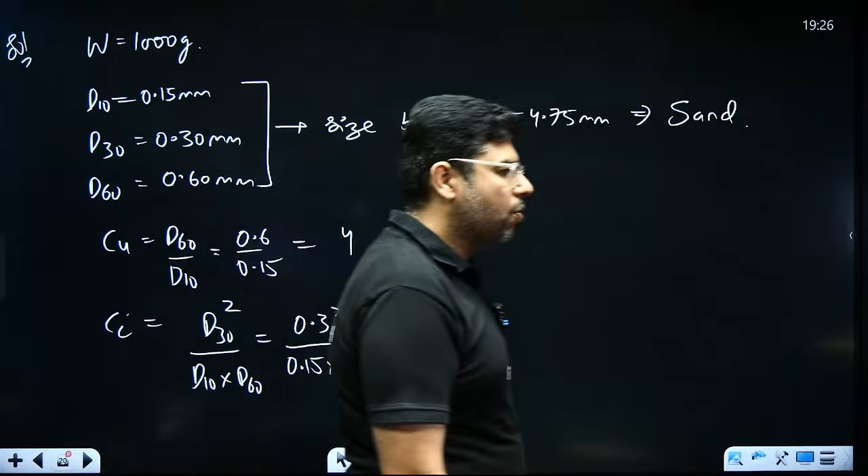Now for sand we have to see Cu and Cc. Cu is D60 by D10. How much Cu do you get, my dear friend? Tell me: 0.6 upon 0.15, that is 4. And Cc is D30 square upon D10 into D60: 0.3 square upon 0.15 into 0.6. So how much Cc are you getting? I got it as 1 only.

So Cu is not greater than or equal to 6, and Cc is between 1 and 3. So Cu is not greater than 6, that is it is less than 6. This implies it is poorly graded sand, represented by the symbol SP.

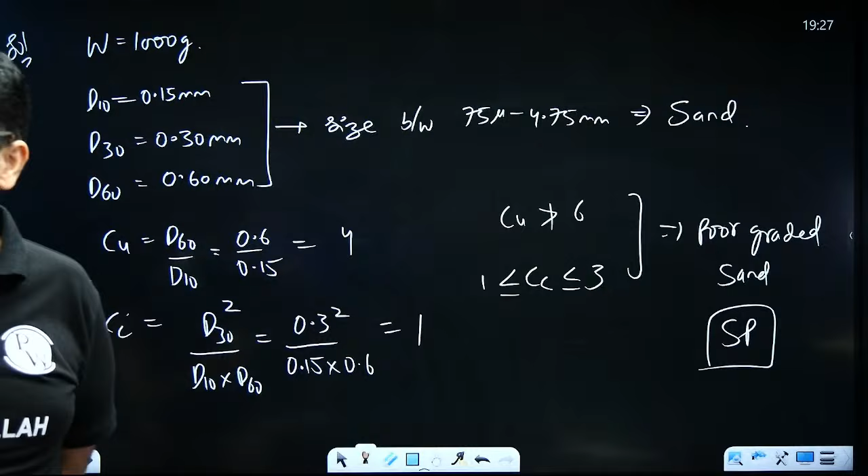So like this you can do this question, and find out the gradation of the soil based on Cu as well as Cc. Okay, Mr. Akash, very good, my dear student. So B was the correct answer. So this was all about the sieve analysis.